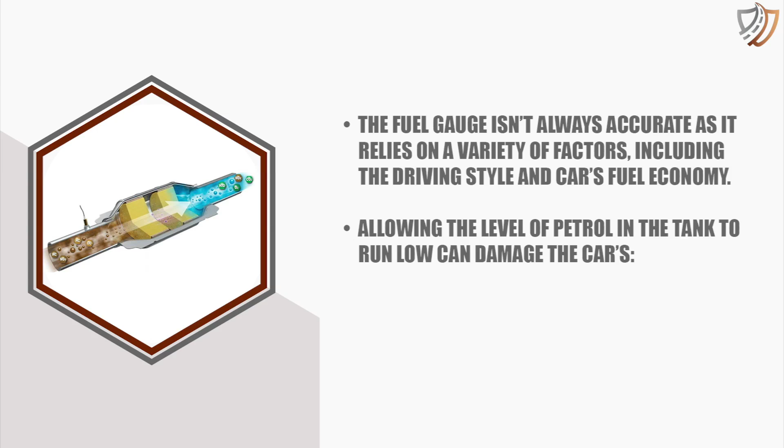According to experts, driving with an empty or close to empty petrol tank is a bad idea because the fuel gauge isn't always accurate, as it relies on a variety of factors, including the driving style and car's fuel economy. Allowing the level of petrol in the tank to run low can damage the car's catalytic converter, fuel pump, and fuel filter, which may then need to be repaired or replaced. If the car suddenly stops, occupants could be stranded in the deserted area or the middle of the freeway. Therefore, motorists should consider this absolutely.

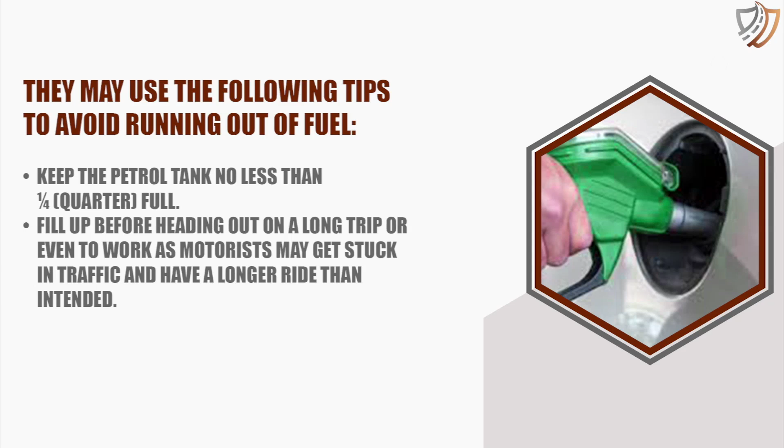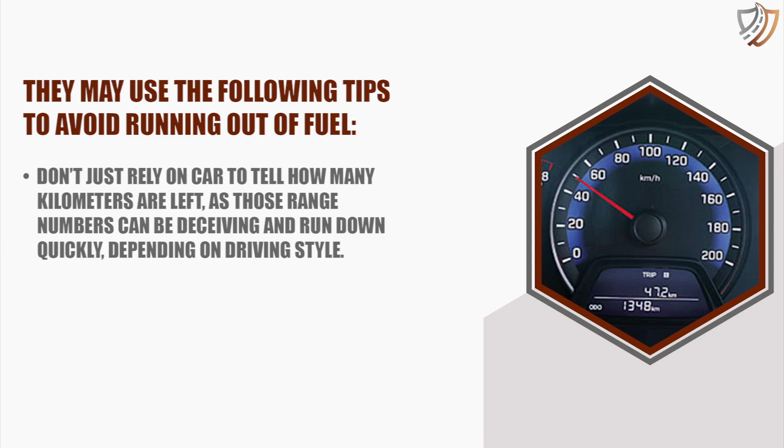They may use the following tips to avoid running out of fuel. Keep the petrol tank no less than 1/4 full. Fill up before heading out on a long trip or even to work, as motorists may get stuck in traffic and have a longer ride than intended. Don't just rely on the car to tell you how many kilometers are left, as those range numbers can be deceiving and run down quickly depending on driving style.

If necessary, use online tools to locate the nearest petrol station. In addition to eco-friendly products, there are fuels such as diesel and NGV to ensure that customers have the petrol type they need for their vehicles.

Oil. Automobile engines have many moving parts. As these parts move and rub against each other, the force of friction creates heat. Oil lubricates the engine and absorbs heat, allowing the internal parts to work together effectively without overheating. There are different types of oils used in the vehicles, such as engine oil, power steering oil, brake fluid, automatic transmission oil (automatic cars only), manual gear oil, clutch fluid (manual cars only), and differential oil.

In general, all these oils should be checked when the engine is cold, most probably in the morning. Before opening any oil cap, it is better to clean the cap's surrounding area with a clean cloth or rag to avoid dirt or debris falling into the oil. Moreover, the vehicle should be parked on a level surface to get accurate results. Let's discuss one by one how to maintain these levels properly.

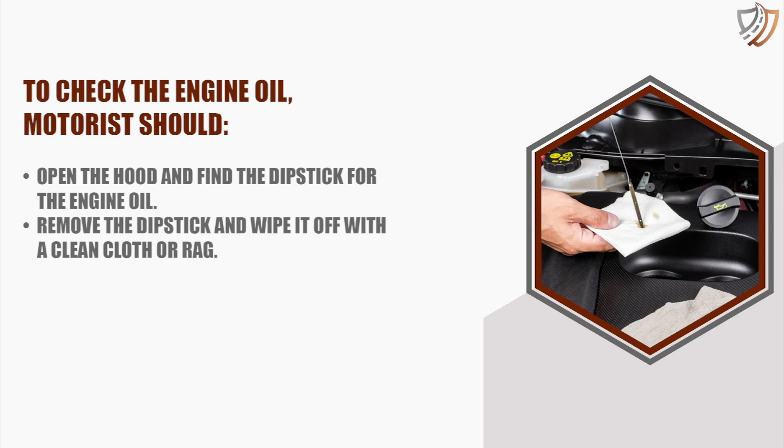Engine oil. Motorists are advised to check the engine oil regularly. Driving with a low oil level in the engine can lead to serious problems including overheating and engine seize. To check the engine oil, motorists should open the hood and find the dipstick for the engine oil. Remove the dipstick and wipe it off with a clean cloth or rag. Reinsert the dipstick completely, pull it out again, and check the oil level.

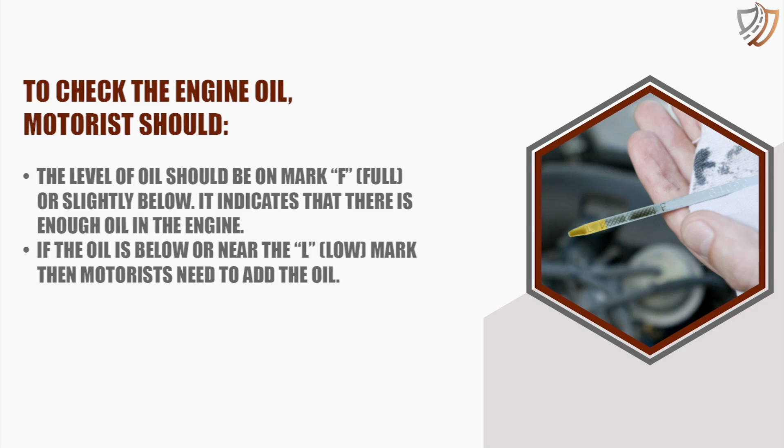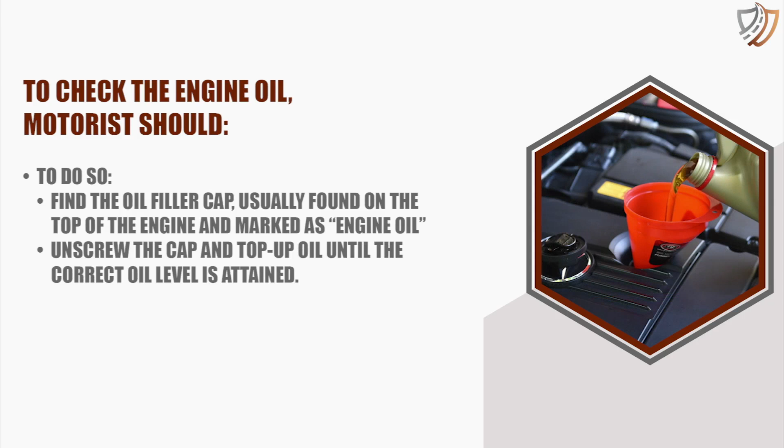The level of oil should be at the F, full, mark or slightly below. It indicates that there is enough oil in the engine. If the oil is below or near the L, low, mark, then motorists need to add oil. To do so, find the oil filler cap, usually found on the top of the engine and marked as engine oil. Unscrew the cap and top up oil until the correct oil level is attained. After filling, replace the cap and make sure it is sealed tight.

It is essential to change engine oil at regular intervals, which mainly depends on the type of oil, usually once every 5,000 or 10,000 kilometers.

Power steering fluid. Power steering fluid provides hydraulic assistance for the power steering system. It improves lubrication in the power steering pump and steering gear. If there isn't enough fluid, steering becomes more difficult and internal parts of the steering pump could be damaged.

Therefore, it's important to check power steering fluid levels on a regular basis and add fluid when necessary. To check the power steering fluid, motorists should locate the power steering reservoir. It is easy to see the fluid level if the reservoir is translucent. In case of a metal reservoir, use the dipstick usually attached to the cap.

Remove the cap and check the level. Read the cold marking on the dipstick if the engine is cold or the hot marking if the engine is hot. If the level is low, use the funnel and add more fluid slowly to the required level. Do not fill it above the max line. After filling, replace the cap and make sure it is sealed tight.

Many manufacturers are switching to an electronic power steering system to make their vehicles more economical, because electronic power steering systems do not require a fluid pump driven by engine rotation to operate, which increases fuel economy.

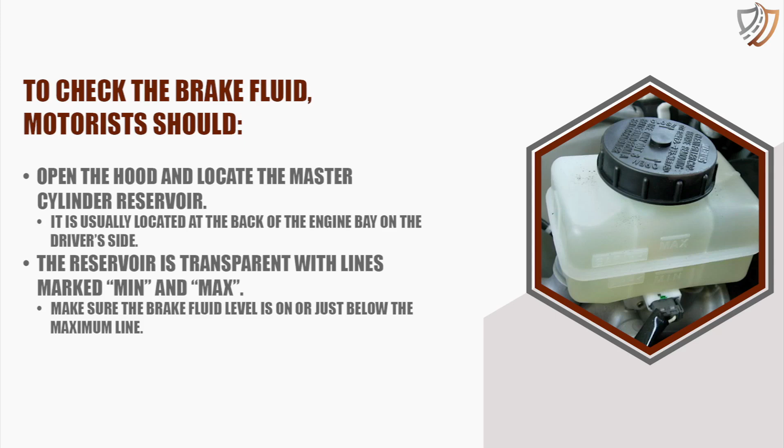If the level is low, pour the brake fluid carefully up to the required level. After filling, replace the reservoir cap. Remember, brake fluid is toxic and corrosive, so wipe up if it spills.

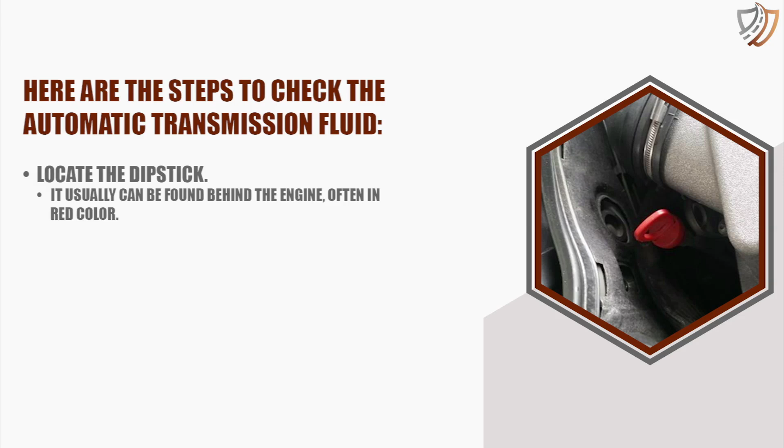Automatic transmission fluid, ATF. Checking the automatic transmission fluid is relatively simple and should be done regularly to ensure the vehicle continues to shift gears smoothly and properly. Here are the steps to check the automatic transmission fluid. Locate the dipstick. It usually can be found behind the engine, often in red color.

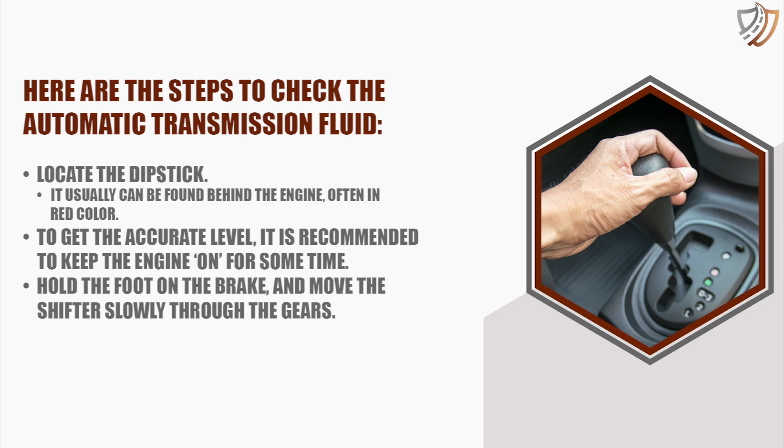To get the accurate level, it is recommended to keep the engine on for some time. Hold the foot on the brake and move the shifter slowly through the gears. Finally, put the shifter in parking mode with the parking brake on. Remove the dipstick, wipe it down with a clean cloth. Replace and then remove it again.

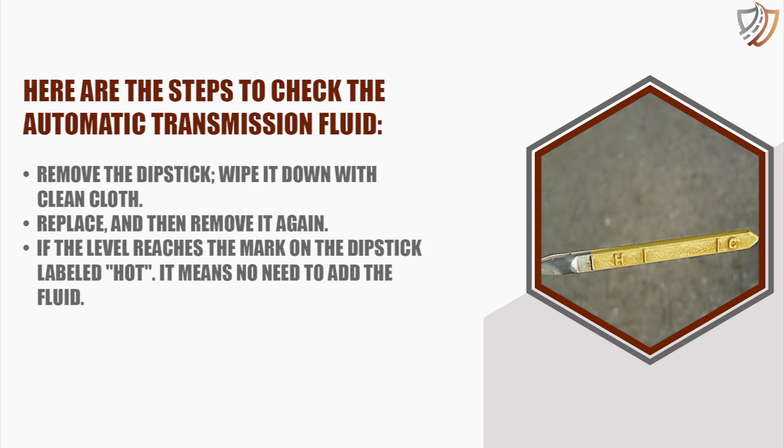If the level reaches the mark on the dipstick labeled hot, it means there is no need to add fluid. In case of low fluid, motorists may top up the fluid through the dipstick opening by using the funnel. Check the vehicle owner's manual for fluid specifications and filling location.

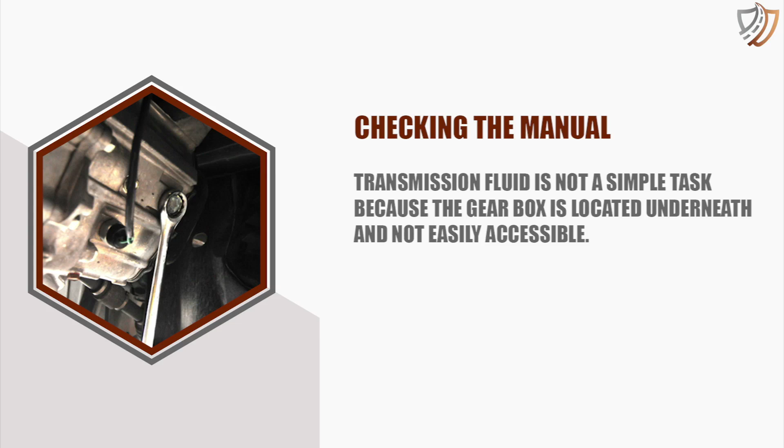Manual gear oil. Checking the manual transmission fluid is not a simple task because the gearbox is located underneath and not easily accessible. To check the gear oil level, motorists are advised to take their vehicles to the workshop or service stations.

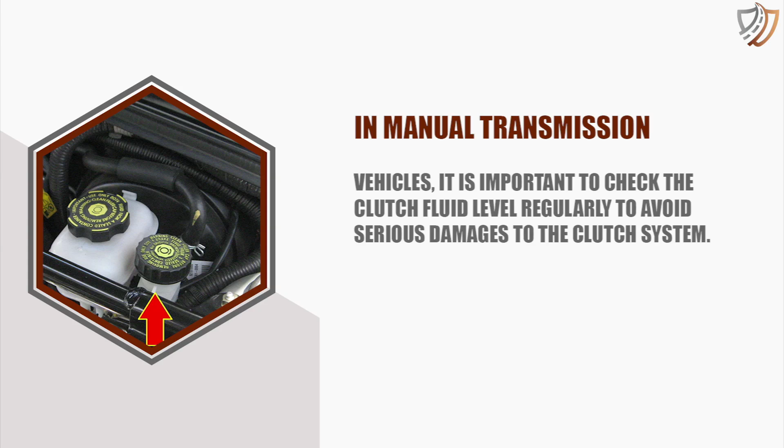Clutch fluid, manual cars only. In manual transmission vehicles, it is important to check the clutch fluid level regularly to avoid serious damage to the clutch system. The checking is similar to the brake fluid system, with lines marked min and max on a transparent reservoir. Make sure the clutch fluid level is on or just below the maximum line.

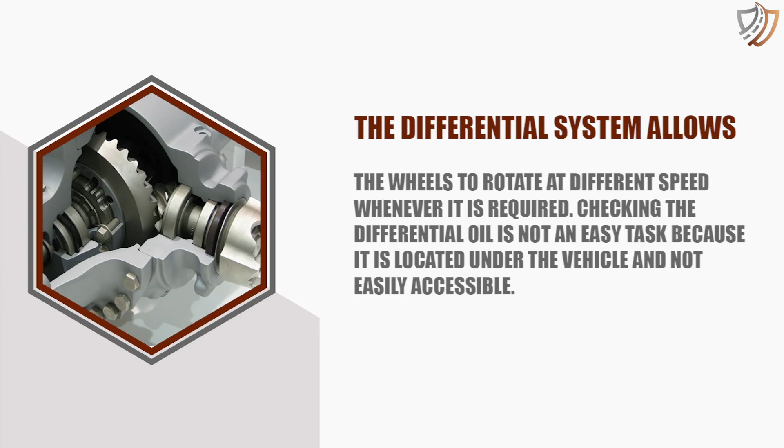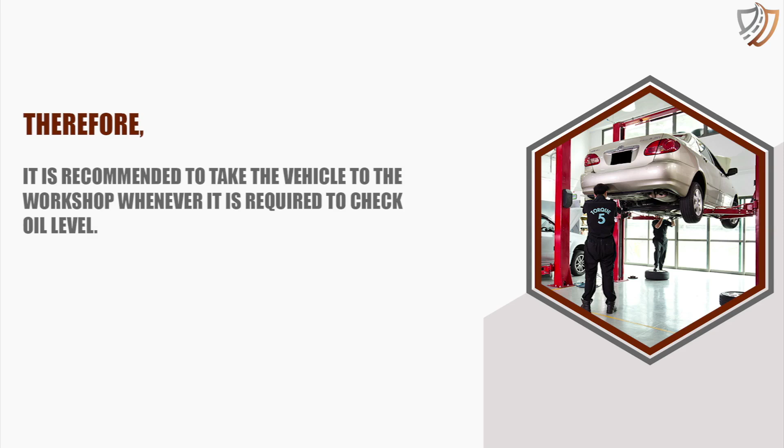Differential oil. The differential system allows the wheels to rotate at different speeds whenever it is required. Checking the differential oil is not an easy task because it is located under the vehicle and not easily accessible. Therefore, it is recommended to take the vehicle to the workshop whenever it is required to check the oil level.

Water. Water is mainly used in the vehicle as coolant and windscreen washer. Coolant. Coolant is used to cool down internal combustion engines. An engine produces a lot of heat when running and must be cooled continuously to avoid engine damage. This is generally done by circulating coolant liquid made of water mixed with an antifreeze solution.

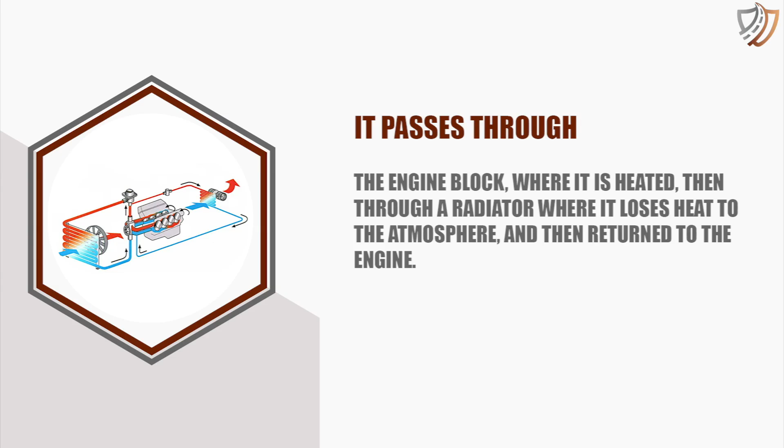It passes through the engine block where it is heated, then through a radiator where it loses heat to the atmosphere, and then returns to the engine. Normal water can also be used in the radiator, but coolant is recommended as it removes and prevents rust and corrosion. It does not freeze due to its lower freezing point. It keeps the engine cool at maximum due to its high boiling point.

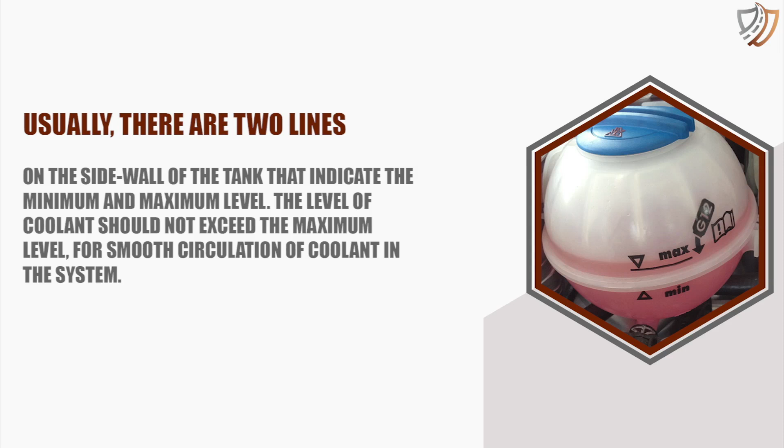Motorists are advised to maintain the coolant level in the radiator and its reservoir tank. Remember, never open the radiator cap directly when it is hot, as it can cause serious injury or damage. In such cases, consider filling up the reservoir tank. Usually there are two lines on the side wall of the tank that indicate the minimum and maximum level. The level of coolant should not exceed the maximum level for smooth circulation of coolant in the system.

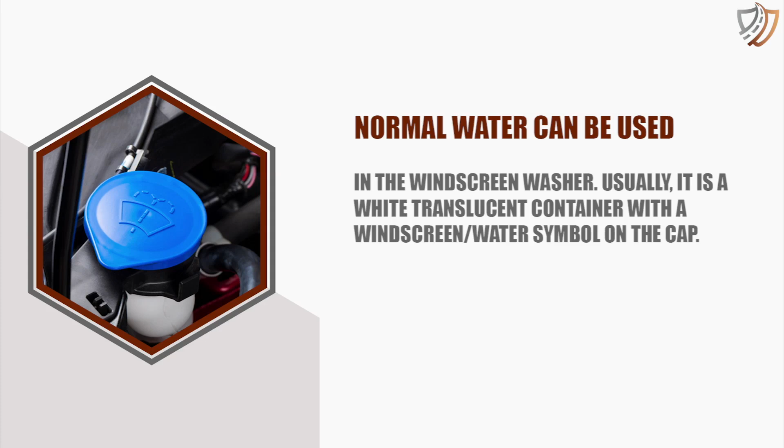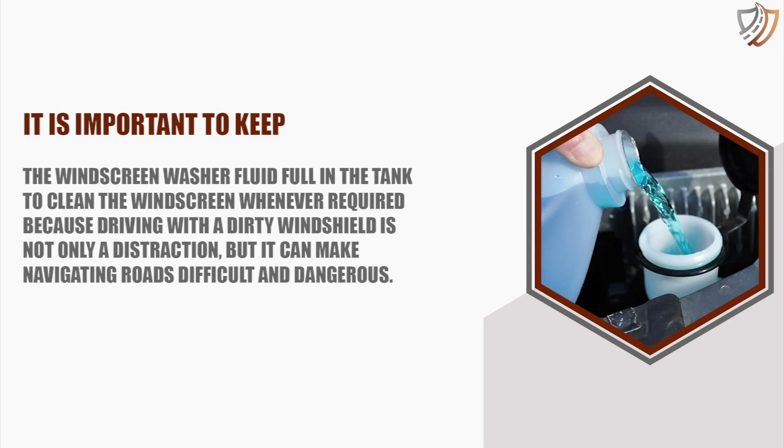Windscreen washer. Normal water can be used in the windscreen washer. Usually it is a white translucent container with a windscreen water symbol on the cap. It is important to keep the windscreen washer fluid full in the tank to clean the windscreen whenever required, because driving with a dirty windshield is not only a distraction, but it can make navigating roads difficult and dangerous.

Electric. Electricity has a vital role in the safe and reliable operation of the vehicle. Battery is the primary source of electrical energy when the engine is not running or is being started. When the engine is running, the alternator recharges the battery and provides power to the vehicle's electrical system.

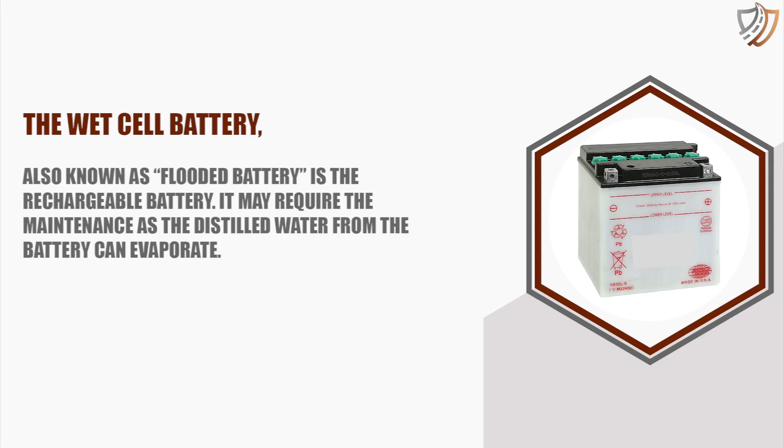Commonly, there are two types of batteries: wet cell battery and maintenance-free battery. Wet cell battery. The wet cell battery, also known as flooded battery, is the rechargeable battery. It may require maintenance, as the distilled water from the battery can evaporate. Motorists should check this regularly to keep the distilled water level up to the upper level, which is clearly marked on the battery. Remember, take extra care while filling the battery with distilled water, because spilling may damage the other parts of the vehicle.

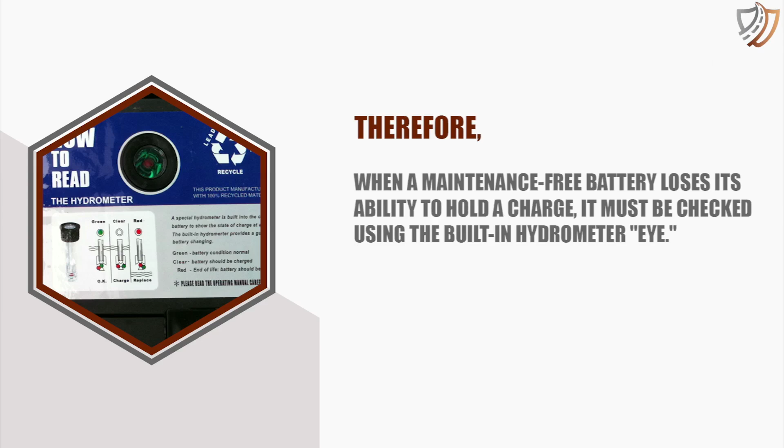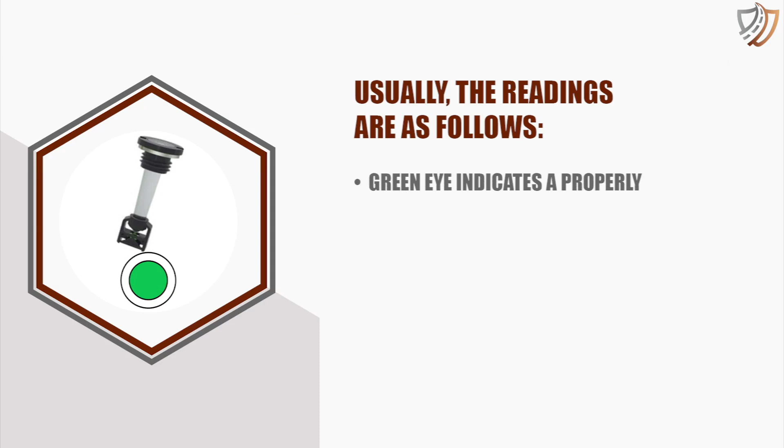Maintenance-free battery. Maintenance-free battery is the one that is not designed to be opened or refilled. Therefore, when a maintenance-free battery loses its ability to hold a charge, it must be checked using the built-in hydrometer eye. The exact type of eye varies between battery manufacturers, but most apply a sticker to the battery itself explaining the possible readings. Usually the readings are as follows. Green eye indicates a properly charged battery. Dark eye indicates a low charge which can be recharged. Light or yellow eye indicates that battery needs replacement.

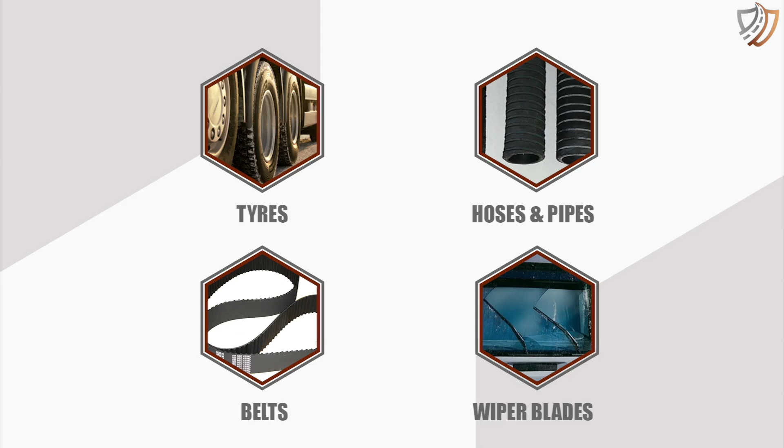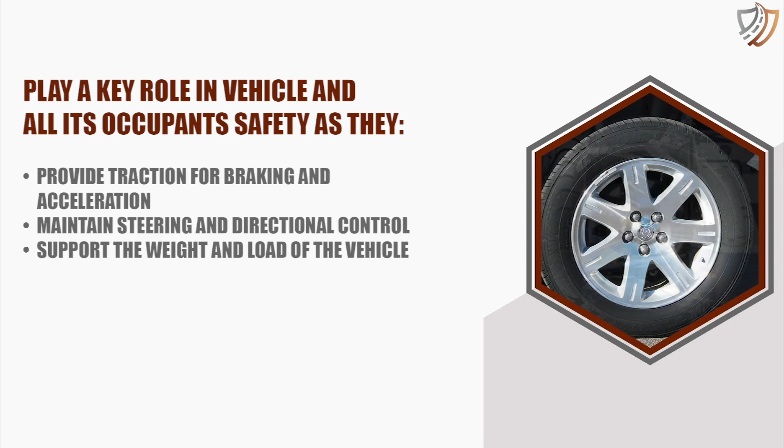Rubber. There are varieties of vehicle parts that are made up of rubber. Some of the most important rubber components and parts are tires, hoses and pipes, belts, wiper blades. Tire. Tires are one of the most important components of the vehicle. It is the only part of the vehicle that has direct contact with the road. Tires play a key role in vehicle and all its occupants' safety, as they provide traction for braking and acceleration, maintain steering and directional control, support the weight and load of the vehicle, and act as a shock absorber for road irregularities. Motorists should consider the following for tire safety: tire type and size, tire condition, tire alignment, tire air pressure.

Tire type and size. The tire type is determined by joint consultation between the vehicle and tire manufacturer, as they take into account all aspects of operations, including comfort, performance, handling, and driving conditions. Motorists may find various codes and markings on the sidewall of the tire. The size is also mentioned on that, which is made up of different numbers and letters.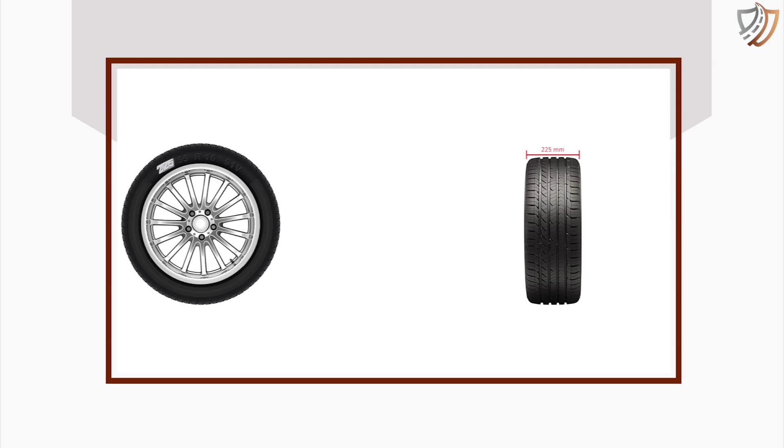For example, the tire size has the following profile, where 225 is the tire section width in millimeters. 55 is the aspect ratio in percentage, the height of the sidewall divided by the tire's width. R is radial, which denotes the tire's construction type. 16 is the rim diameter in inches. 91 is the load index. V is the speed rating. This information is important to choose the accurate tire for the vehicle. The right choice helps influence a number of key factors, including driving comfort, tire noise level, and fuel consumption rates.

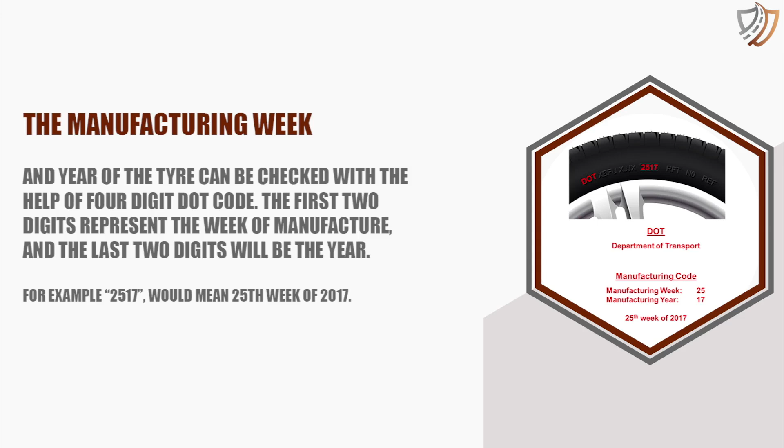Tire condition. The condition of the tire can be checked with the help of the following measures: tire age, tread depth, tread wear indicator, visual inspection. Tire age. In this region, it is recommended that the tires must not be used more than 4 years. The manufacturing week and year of the tire can be checked with the help of a 4-digit DOT code. The first 2 digits represent the week of manufacture, and the last 2 digits will be the year. For example, 2517 would mean 25th week of 2017.

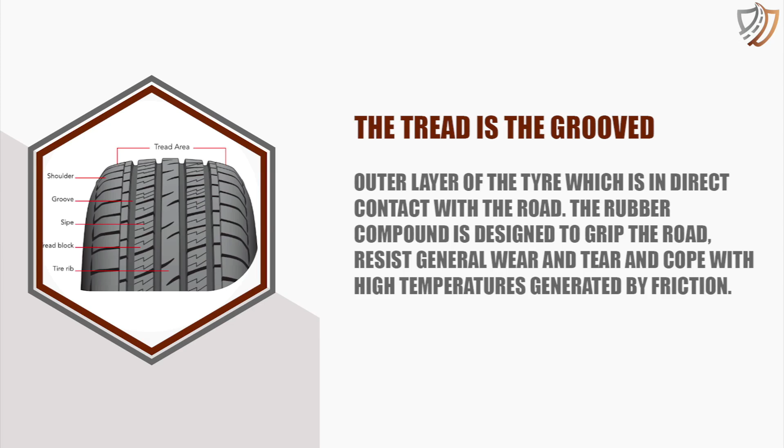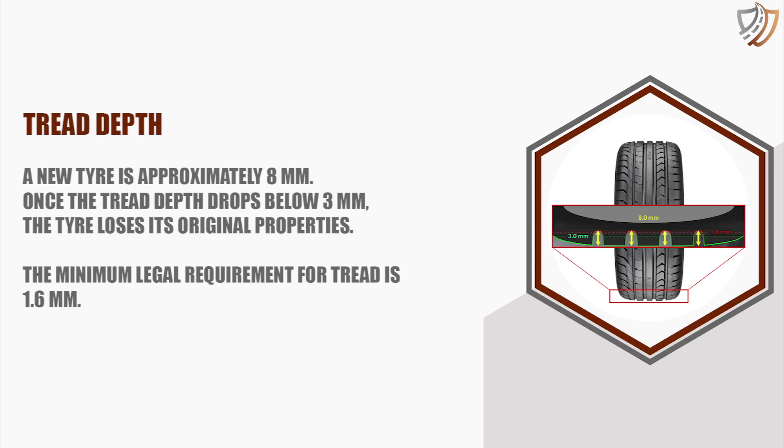Tread depth. The tread is the grooved outer layer of the tyre which is in direct contact with the road. The rubber compound is designed to grip the road, resist general wear and tear, and cope with high temperatures generated by friction. Tread depth of a new tyre is approximately 8 mm. Once the tread depth drops below 3 mm, the tyre loses its original properties. The minimum legal requirement for tread is 1.6 mm. However, it is advisable to be on the safer side and change the tyres when tread depth drops below 3 mm.

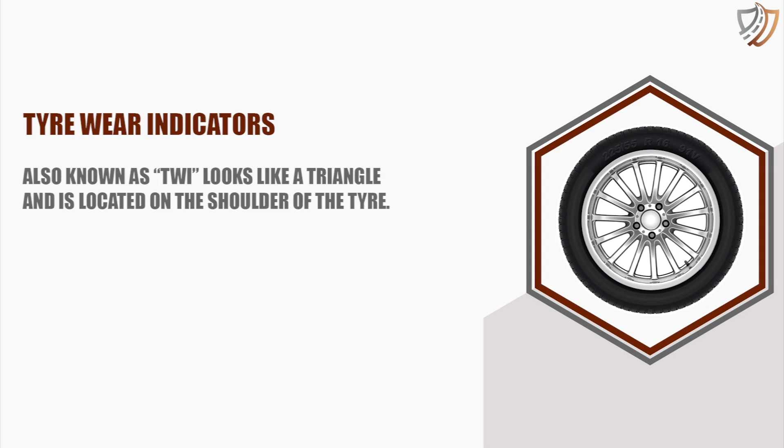Tread wear indicator. Tyre wear indicators, also known as TWI, look like a triangle and are located on the shoulder of the tyre. It indicates that there is a tread wear indicator bar that is moulded at the bottom of the grooves at several locations. When these bars become visibly level with the adjacent ribs, it means the tyre has no more than 1.6 mm of tread remaining. Therefore, tyres must be replaced before the tread reaches this bar level.

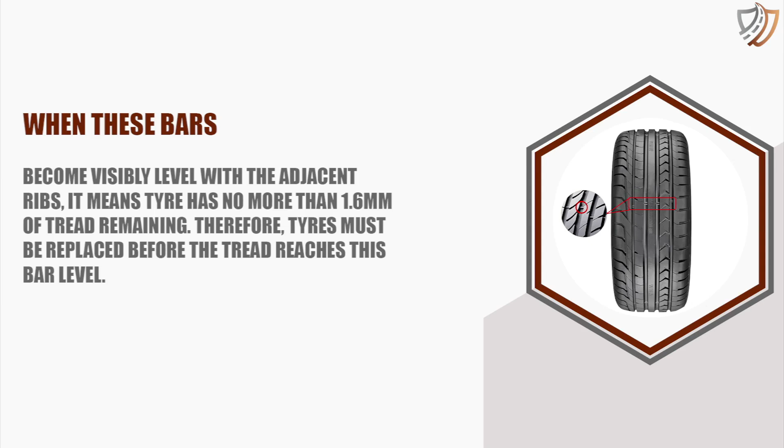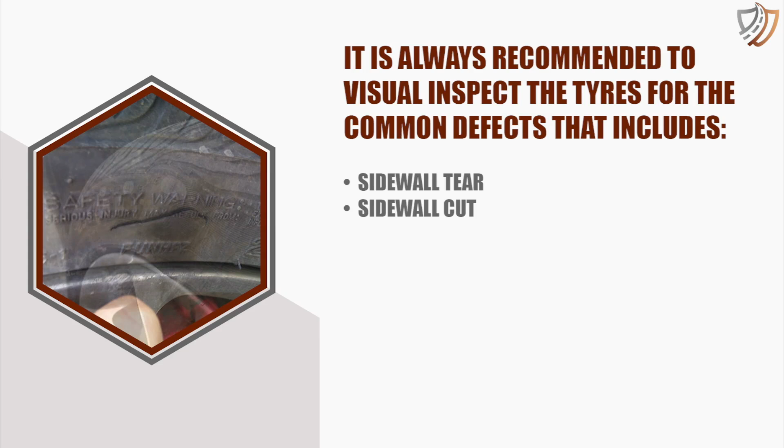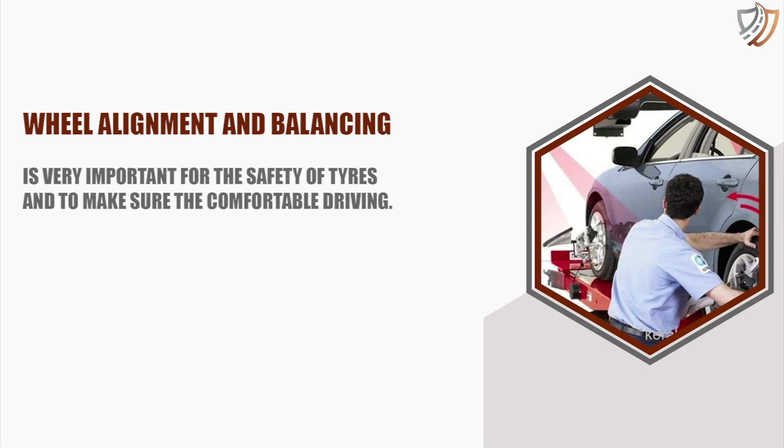Visual inspection. It is always recommended to visually inspect the tyres for common defects that include sidewall tear, sidewall cut, bulges, exposed plies, penetration damage. Wheel alignment and balancing. Wheel alignment and balancing is very important for the safety of tyres and to make sure of comfortable driving. Misaligned wheels can cause tyres to wear more quickly and irregularly.

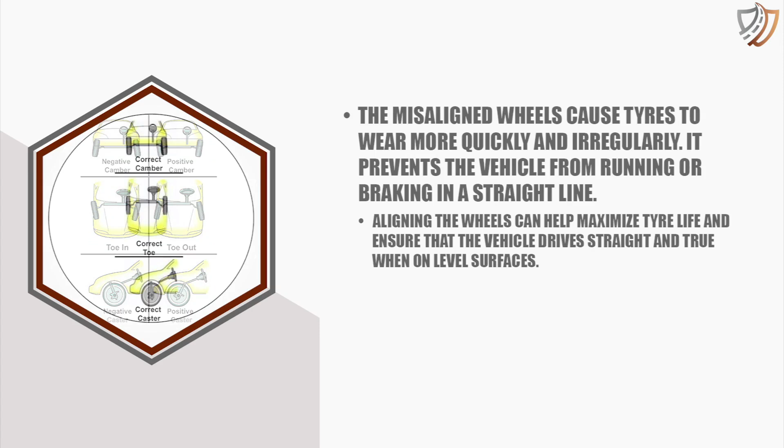It prevents the vehicle from running or braking in a straight line. Aligning the wheels can help maximize tyre life and ensure that the vehicle drives straight and true when on level surfaces. The improper wheel balancing causes extra stress on the suspension, shock absorbers and steering components, which can cause the unusual vibration or thumping noise, called cupping.

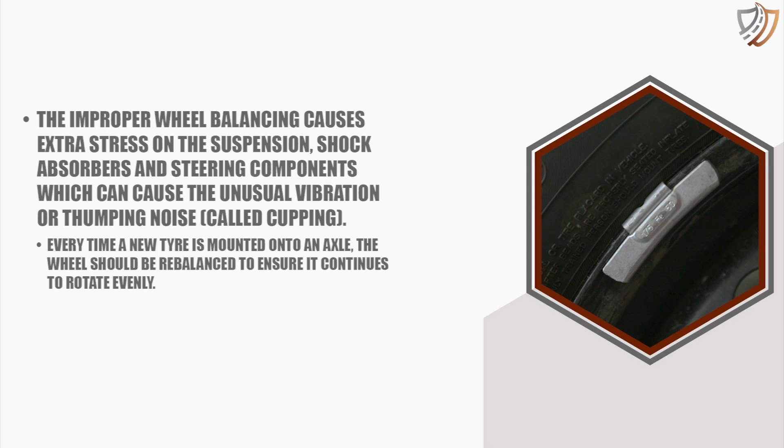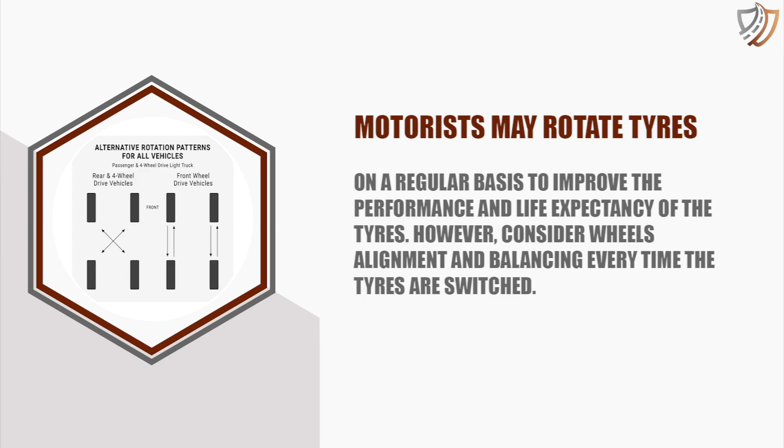Every time a new tyre is mounted onto an axle, the wheel should be rebalanced to ensure it continues to rotate evenly. Motorists may rotate tyres on a regular basis to improve the performance and life expectancy of the tyres. However, consider wheel alignment and balancing every time the tyres are switched. It is a good idea to use the computerized alignment machine for automatic, quick, and accurate calibration.

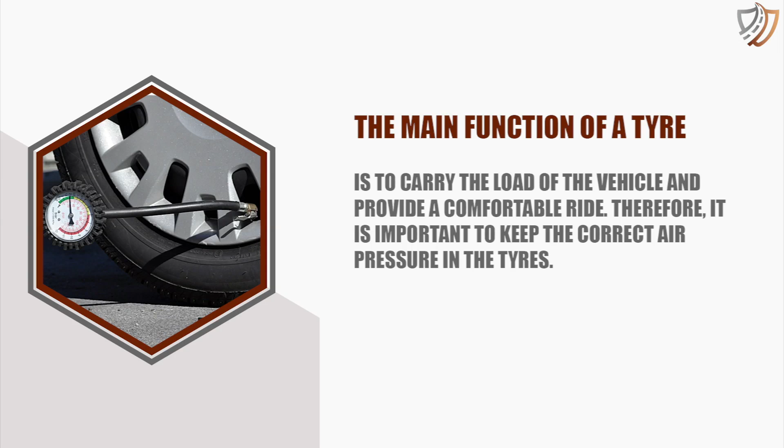Tyre air pressure. The main function of a tyre is to carry the load of the vehicle and provide a comfortable ride. Therefore, it is important to keep the correct air pressure in the tyres. The correct air pressure can be found in the vehicle owner's manual and on a placard mounted on the vehicle. Motorists should check this on a regular basis, preferably every fortnight, because the tyre air pressure can drop naturally and may reduce up to 2 psi in a month.

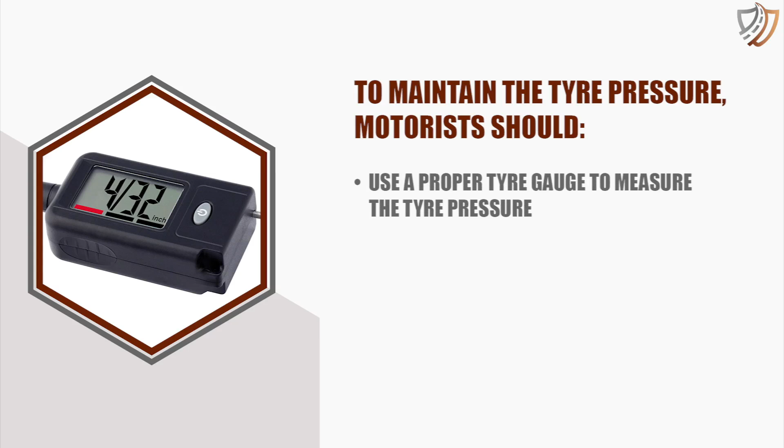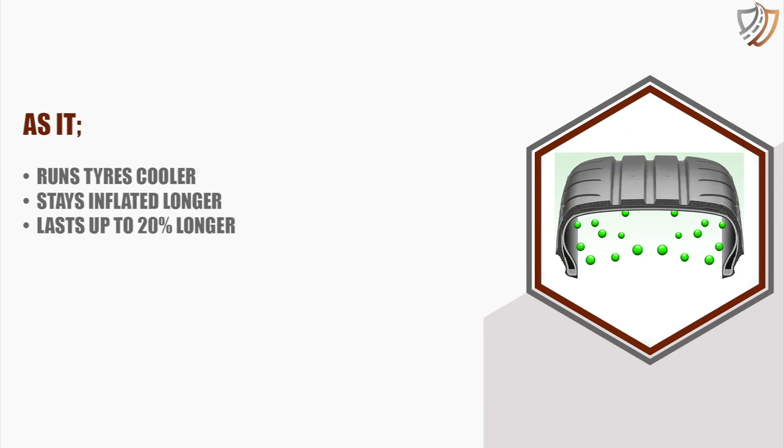Both underinflated and overinflated tyres get damaged more easily. To maintain the tyre pressure, motorists should use a proper tyre gauge to measure the tyre pressure. Check pressure and inflate only when the tyres are cold. Inflate the spare tyre at least 10% extra than the running tyre. Tip: consider inflating tyres with nitrogen rather than old-fashioned air, as it runs tyres cooler, stays inflated longer, and lasts up to 20% longer.

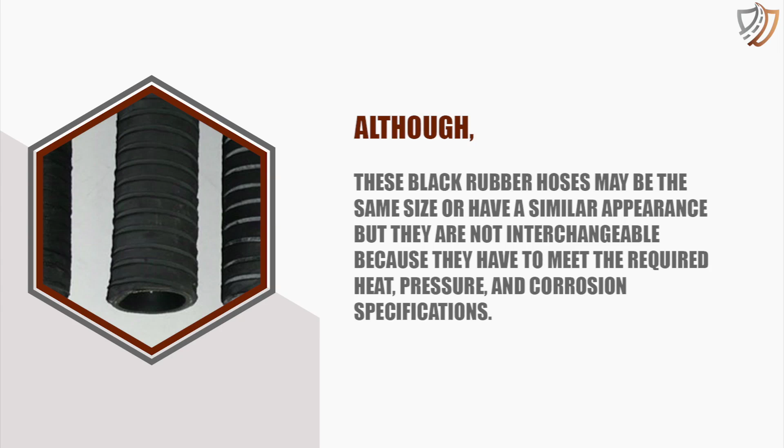Hoses and pipes. In the engine compartment, there are varieties of rubber and rubber-type hoses. These include radiator hoses, hydraulic hose, fuel hose, and vacuum hose. Although these black rubber hoses may be the same size or have a similar appearance, they are not interchangeable because they have to meet the required heat, pressure, and corrosion specifications.

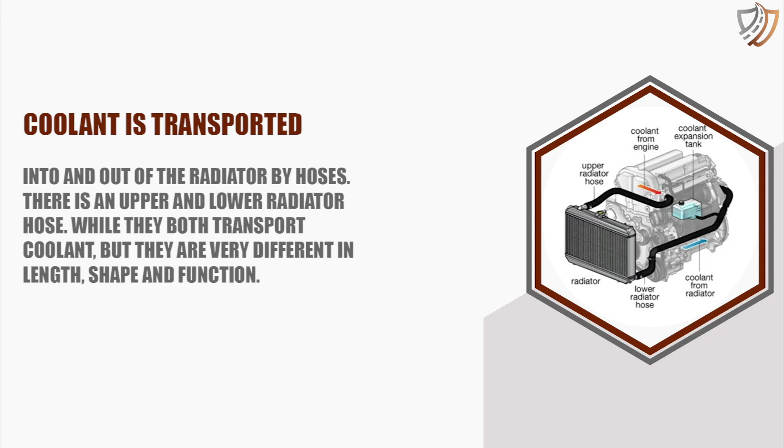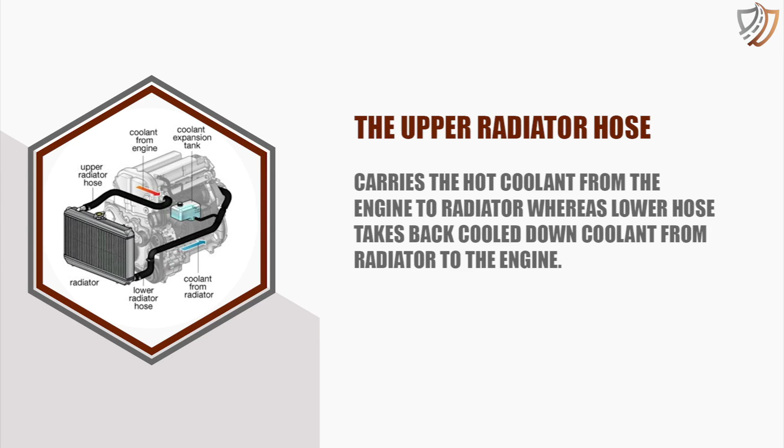Radiator hoses. Coolant is transported into and out of the radiator by hoses. There is an upper and lower radiator hose. While they both transport coolant, they are very different in length, shape, and function. The upper radiator hose carries the hot coolant from the engine to radiator, whereas lower hose takes back cooled down coolant from the radiator to the engine.

Hydraulic hoses. It provides the ultimate fluid conveyance like the brake or clutch fluids. Fuel hoses. It carries the fuel from the fuel tank to the carburetor or fuel injectors to power the engine. Vacuum hoses. It determines the air and fuel mixture needed for the best performance.

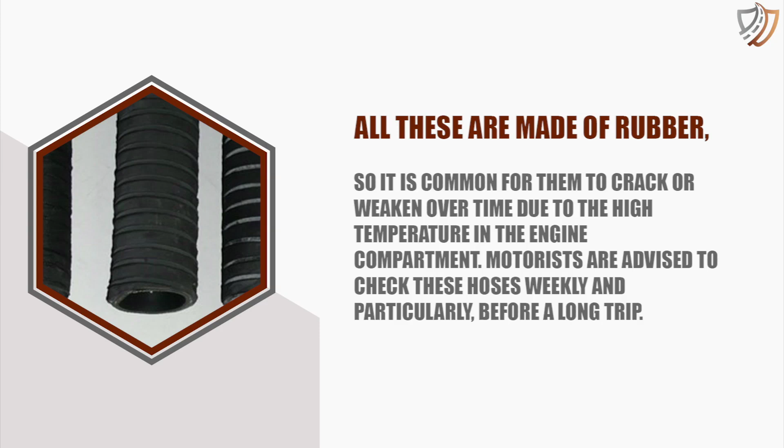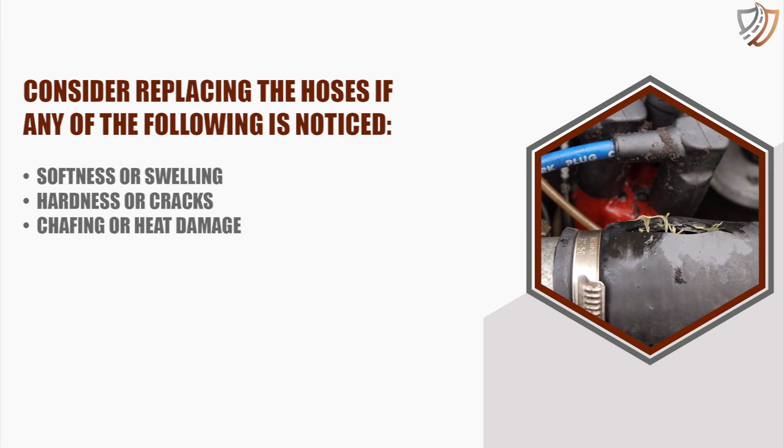All these are made of rubber, so it is common for them to crack or weaken over time due to the high temperature in the engine compartment. Motorists are advised to check these hoses weekly and particularly before a long trip. Consider replacing the hoses if any of the following is noticed: softness or swelling, hardness or cracks, chafing or heat damage. Remember, a good hose will be firm, flexible, and free of swelling or cracks.

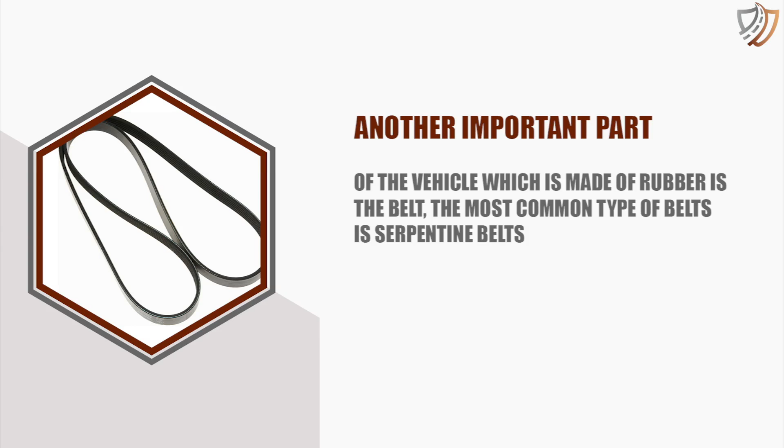Belts. Another important part of the vehicle which is made of rubber is the belt. The most common type of belts is serpentine belts. A serpentine belt, also known as drive belt, provides power to the air conditioning compressor, power steering pump, cooling fan, air injection pump, and more. It is a single long belt that drives all the engine components that would otherwise be powered by multiple V-belts.

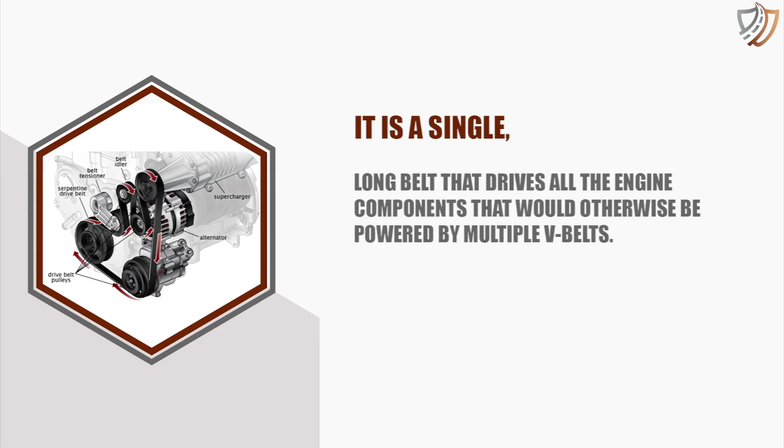If the vehicle's serpentine belt breaks, all of the engine parts it is powering will stop working, and the engine could overheat and be damaged. Therefore, look for cracks, wear and stripping to determine if it is in danger of failing. Another belt which is inside the engine is the timing belt. The slapping noise indicates a slipped belt which can be struck by the engine's piston. If the timing belt breaks, it can cause major engine damage. Therefore, it is important to check the timing belt by a professional mechanic as per the manufacturer's recommendations.

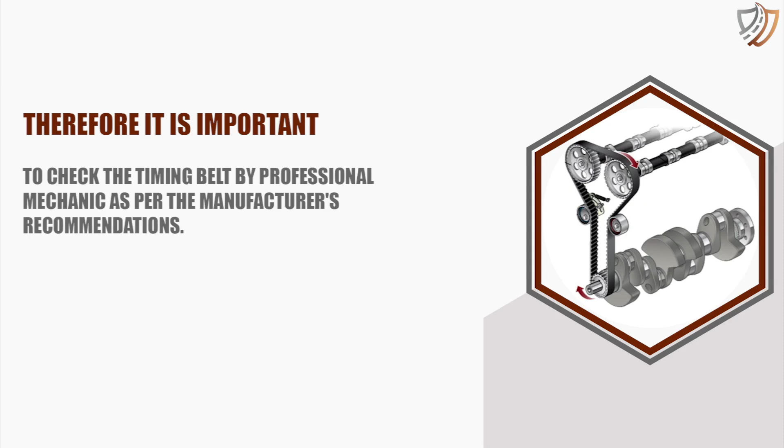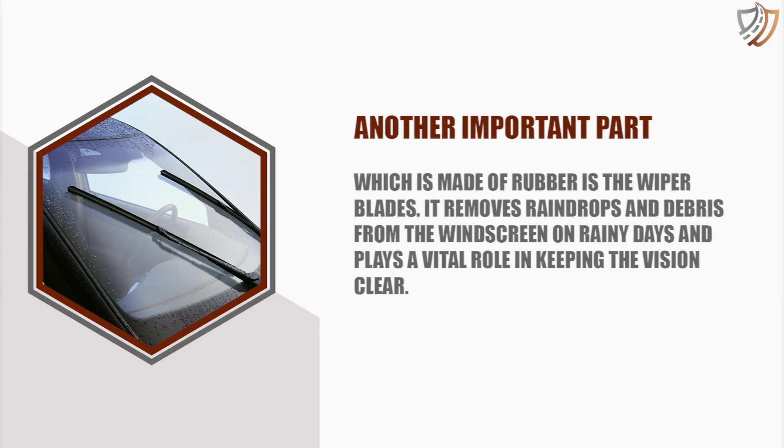Wiper blades. Another important part which is made of rubber is the wiper blades. It removes raindrops and debris from the windscreen on rainy days and plays a vital role in keeping the vision clear. As the windshield wipers are constantly exposed to sunlight at high temperatures, motorists are advised to park the vehicle in covered parking, especially when parking for a long time. Otherwise, lift the wiper blades and keep them away from the windshield.

POWER is the simple way to remember and quickly check the vehicle for ensuring the roadworthiness of the vehicle. Many modern vehicles have the complete computerized system. Therefore, the engine compartment is completely covered. In such vehicles, regularly monitor the computerized mechanism. In case of any fault or warning light, motorists may contact the authorized service centers for appropriate action.